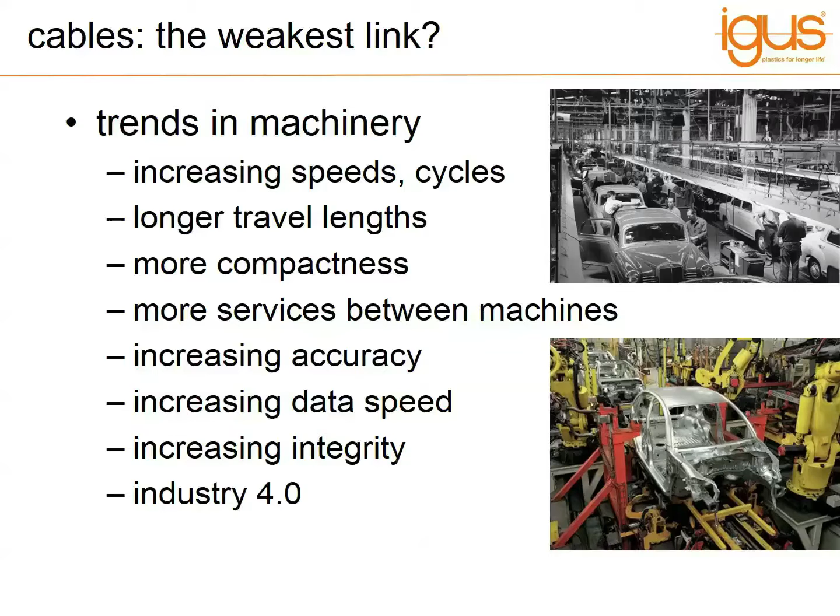Now these trends together are leading to a lot of demands on cables which are moving. So anywhere where you have a moving part of a machine and a fixed part of a machine, the cables in between, we are seeing more and more issues arising with these types of moving cables because of all of those trends. The typical things that we see are slow data rates, which is, for example, coming out of attenuation or interference. We're seeing weaker signals sometimes, and most commonly intermittent signals and dropouts, which are the hardest ones to track down. And often our customers tell us they check all sorts of other parts of the machine, but in fact cables are often one of the first places you should look when you get this kind of behavior.

So what are the solutions? Well, one of the possible solutions that people were talking about in the past years has been wireless, and that it might be a cure for all of these ills. And on the face of it, that's a really good idea. We get rid of the moving cable completely.

However, as our customers are using more and more wireless solutions within factories, we're seeing that there are accompanying issues of interference in a very crowded bandwidth, and also, for example, metal structures within buildings sometimes blocking signals or interfering with them. And then the other side of the same coin is, how do we feed power or indeed fluids, hydraulic or air, to something wirelessly? There are people working on the idea of inductive power, but that's still far from a reality. And as soon as your machine needs air or hydraulics, then of course that cannot be done wirelessly.

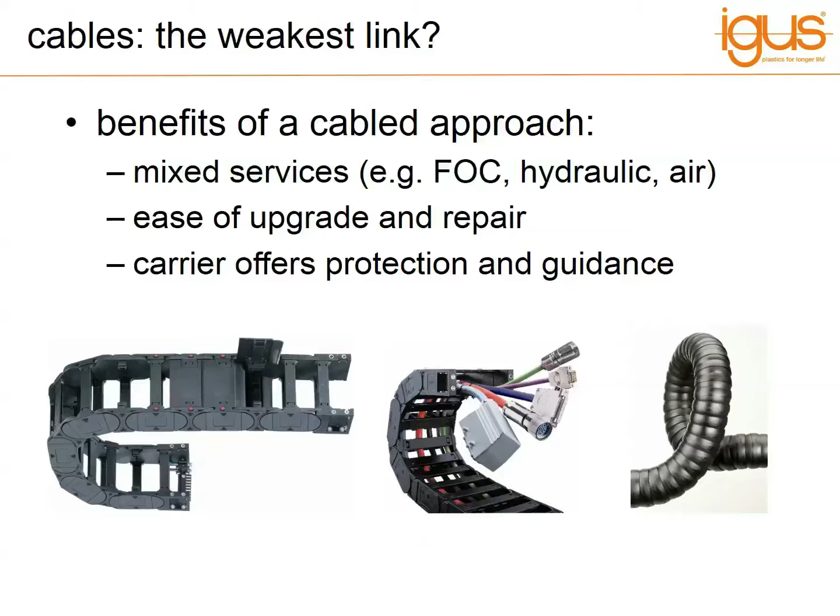The next effect, which is quite commonly seen, is what we call corkscrewing, where the cable as a whole takes up this corkscrew type shape. And if you've ever handled this, you'll also know that the cable feels quite stiff, and that's to do with how the copper has work hardened inside.

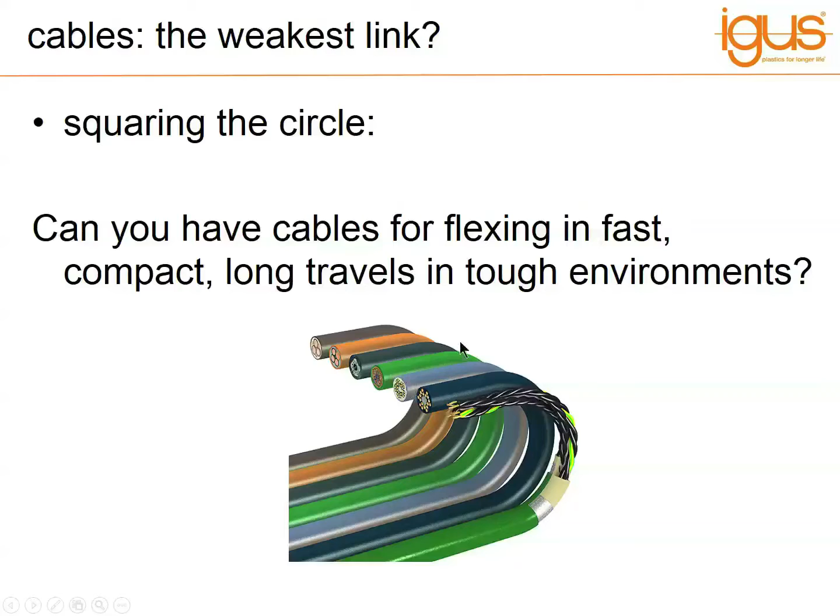So what we want to talk about today is, can we square the circle? Can we get all the benefits of cables and a cabled approach from moving machinery, which will also work in this increasingly fast, compact, sometimes long travel, and in many cases tough environments that are presented by modern day machines? Well, of course, we believe the answer is yes.

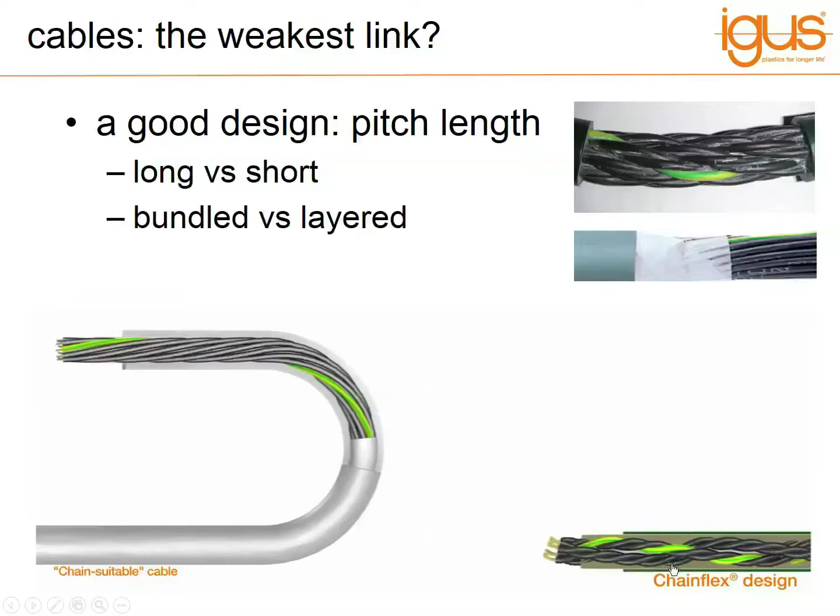Also, in many cases, cables will simply be layered, again like this design here, where they're just laid up in layers. And what we've discovered is that there's a much better approach, particularly with high levels of multi-cores, that once we get to a 12 is to bundle. So very, very tight pitch. You can see the same position very, very quickly, but then bundling, taking these bundles and braiding them in the opposite direction.

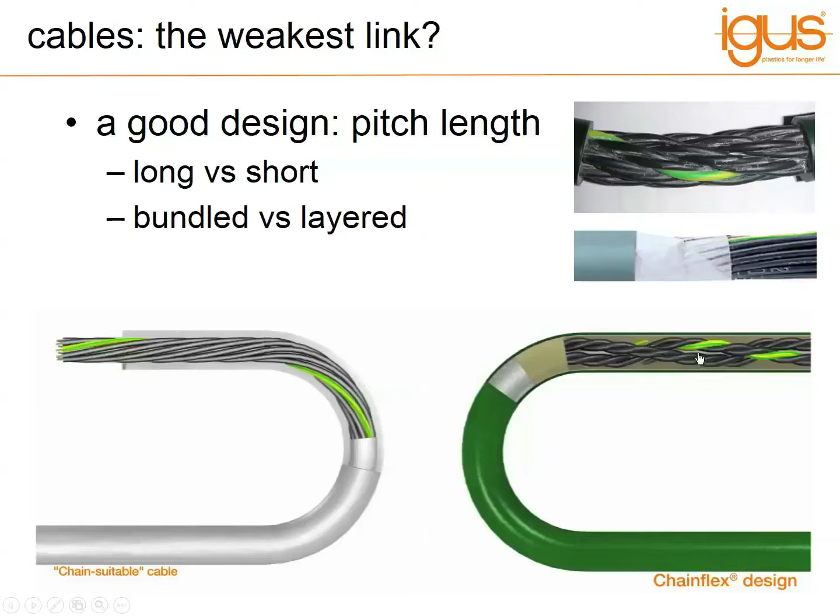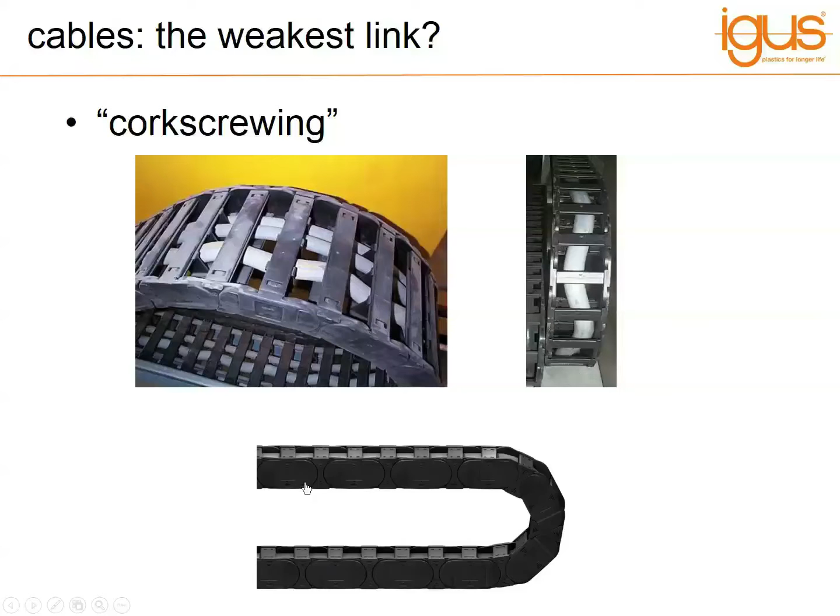And what this means is that all the cores see a similar level of strain. Why is that important? Well, this is the real factor that drives the corkscrewing effect. And here you can see some corkscrewed cables inside cable carriers and energy chains, and this will show why that is.

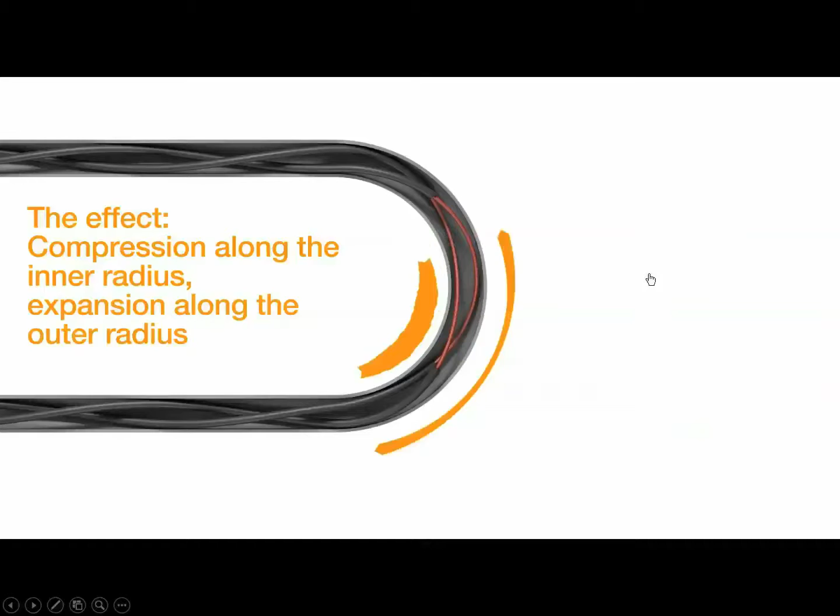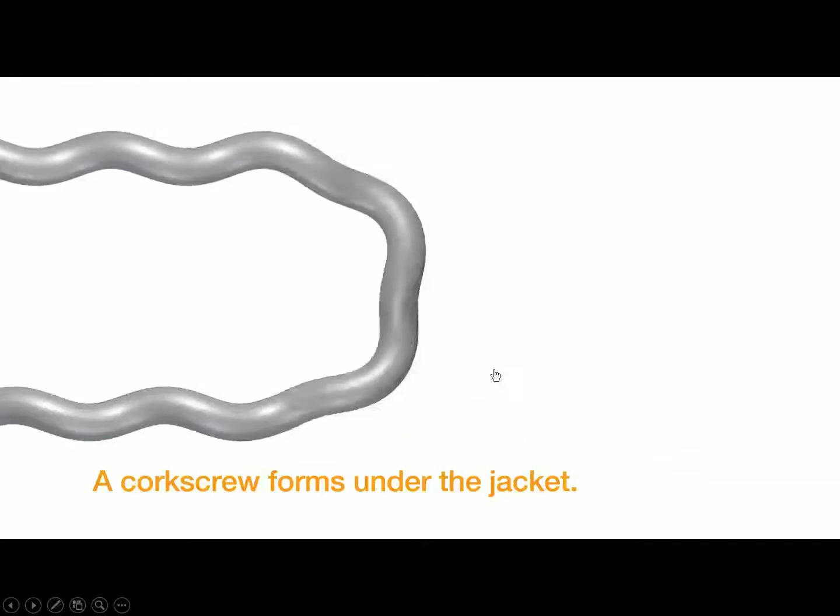So as the cable is moving inside the energy chain backwards and forwards, what's actually going on, as I just said, if we strip that down to just looking at a couple of individual strands, individual cores within this multi-core, you can see that one of these is being stretched and one of them is being compressed. And because they're away from the neutral axis, that's quite a big relative movement, and what will start to happen is that there'll be work hardening of the copper, and you start to get this lumpy effect, which is what we call corkscrewing. The cable takes on a corkscrew type shape.

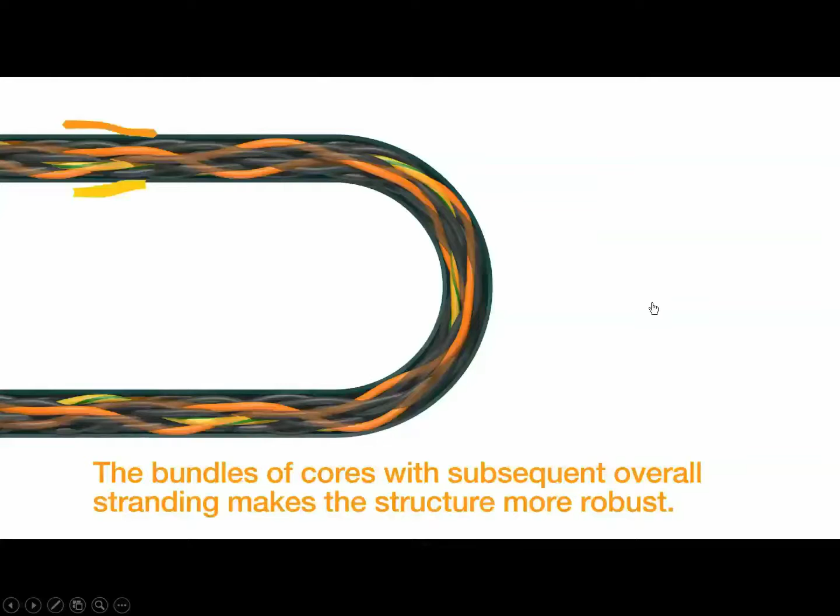If you bundle the cables and braid them with a very tight pitch, then, as I said before, all of the cores see a very similar strain, and you can see by the position of the earth core that it moves to the inside, to the outside, and back again very quickly, and all cores do the same, giving a very similar strain. And this is something that ensures that you have a cable which does not take on the corkscrewing shape.

The next thing we want to look at is the design of the shielding, and on the left hand side we have a fairly typical standard cable shield which is wound from one direction fairly loose, but what we've discovered is that really doesn't work very well at all in a constantly flexed application. The reason being, as you bend it, the outside here will stretch, and often these individual strands are being pulled quite a lot, and they'll break and they'll start to cause shorting or just opening up.

On the right hand side we see a very tightly braided approach with a very shallow angle. If you look at the angle compared with the left picture, you can see this is very shallow, and that means that two things happen. As you flex this cable, the stretching effect on the strands is much less, and also the opening effect and the allowing of electromagnetic interference is much less as well.

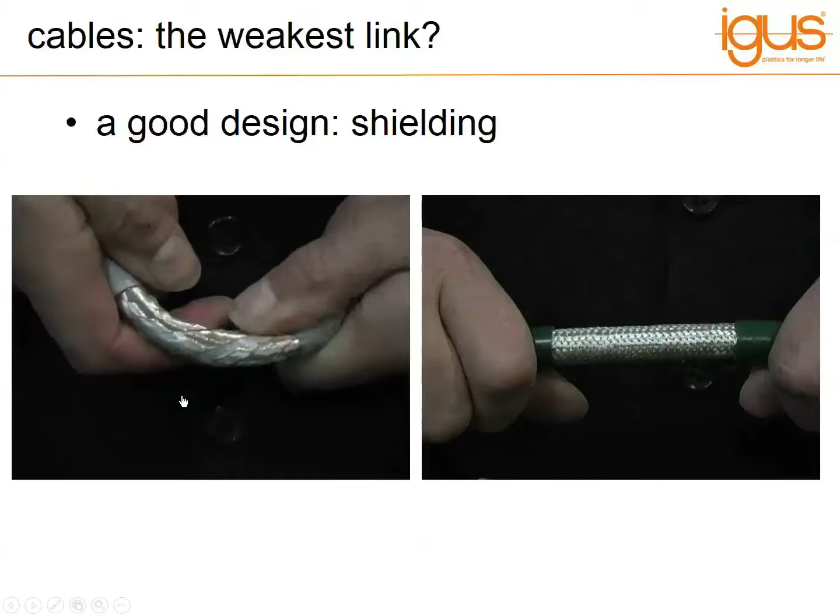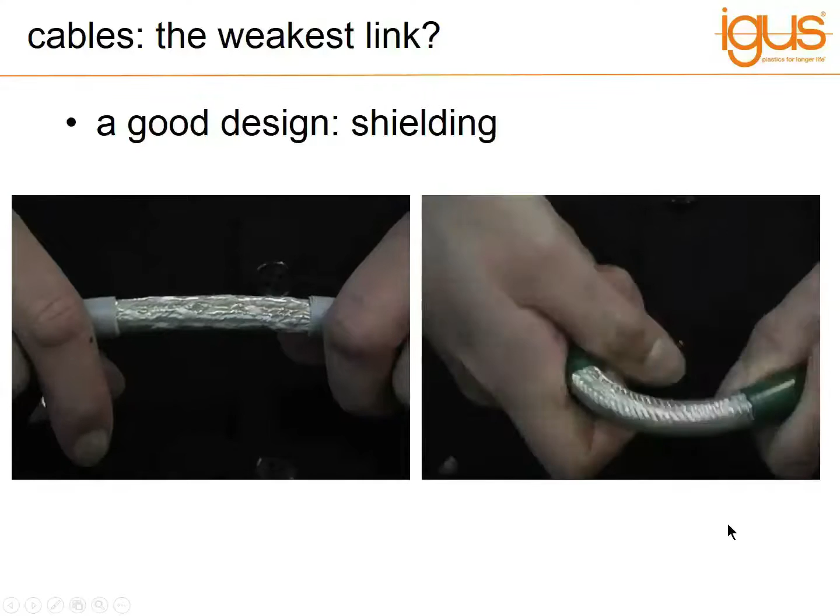So if we look at the next slide, you can see that as we take this cable and bend it, which is a standard so-called flexible cable, you can just move the strand wires around very easily, which means they can open up and really don't offer the same level of protection. If we look at the right side, as we bend that quite slightly, you can see that there's really no opening up, and that shield remains intact, which is good from a perspective of electromagnetic interference.

Next, we look at the jacket design. Now, on the right-hand side, if we believe that this braided bundled design is a good approach, what we now need to do is lock that in place and ensure that it stays put. Now, most standard cheap flexible cables will have what's called a hose extruded or sleeve extruded outer jacket, which means it's very loose. That's put over the top, and it means the cores can move around underneath.

The right hand side is something we discovered, that if you have a fully gusset filling pressure extruded jacket that fills in all the gaps and gussets around here, that locks the shape that you've built up with the cores in place and keeps it the way that it should be.

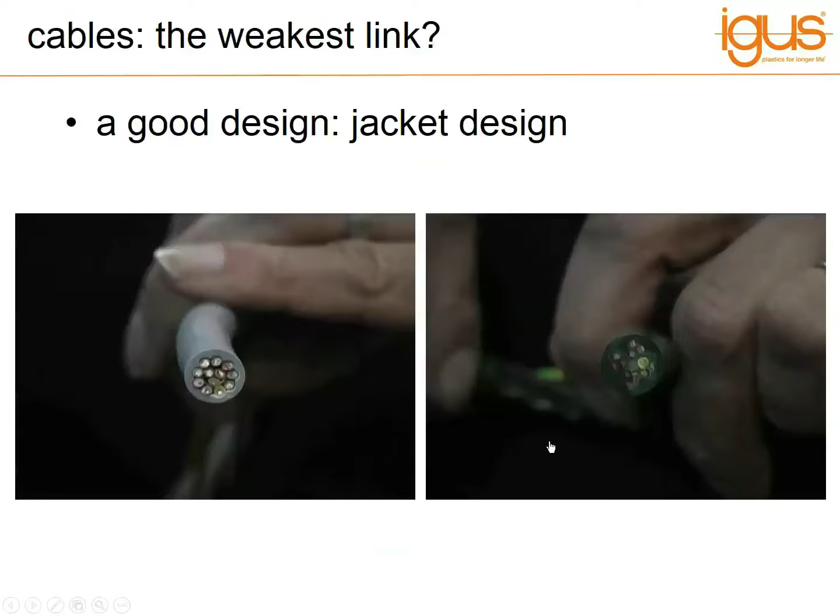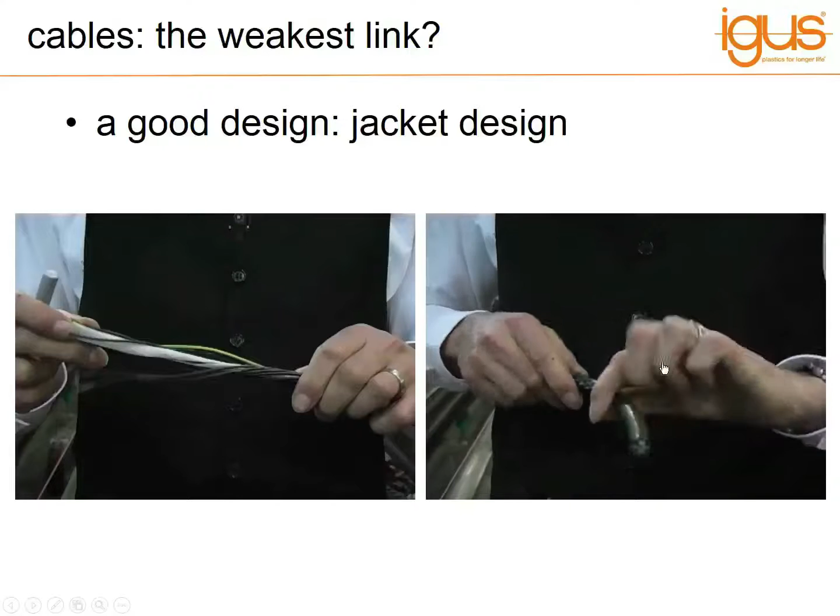And again, if we look at this video here, there's a standard cable. The typical way that you can see that is you can just pull the outer sleeve and it comes right off. And on the right hand side, the pressure extruded jacket, the way that you can tell that it's really guarding the layup of the cable really well is that you won't be able to pull that off very easily. It means that cables are a tiny bit harder to strip, but actually that's a small price to pay for something which is going to last very well in the long run.

Finally, when we're talking about outer jackets of cables, we want to look at jacket materials. Now, the two families of materials that most cable makers use are PVCs and PURs. And in some cases, you'll also see TPEs. We use this. This is a very high-grade material, the thermoplastic elastomer family, which is very good for absolutely the hardest

of environments. So PVCs are nice and cost-effective, but they are weak when it comes to abrasion, or if they're under UV light or temperature changes or oil, they can become brittle and fracture. PURs are much better for the above things, coolants and oil and temperature changes, and TPEs in fact are much better still. They're even harder and even better under different temperature ranges.

But one of the crucial things to understand is that the term PVC, PUR and TPE is a very generic term. So not all PVCs are the same. And you can see this here, for example, from these photos. There are 3 compounds that we've been involved with developing, and all of these are PVCs. They've all been subjected to the same abrasion test, but look at the difference here.

So the bottom one, for example, the outer jacket has gone right through to the cores. The middle one has had some abrasion, it's almost flat, but nowhere near as much. And the top one has some marking, but really hasn't taken much off the outer jacket. Now, all 3 of those are still PVC and could be labelled as such.

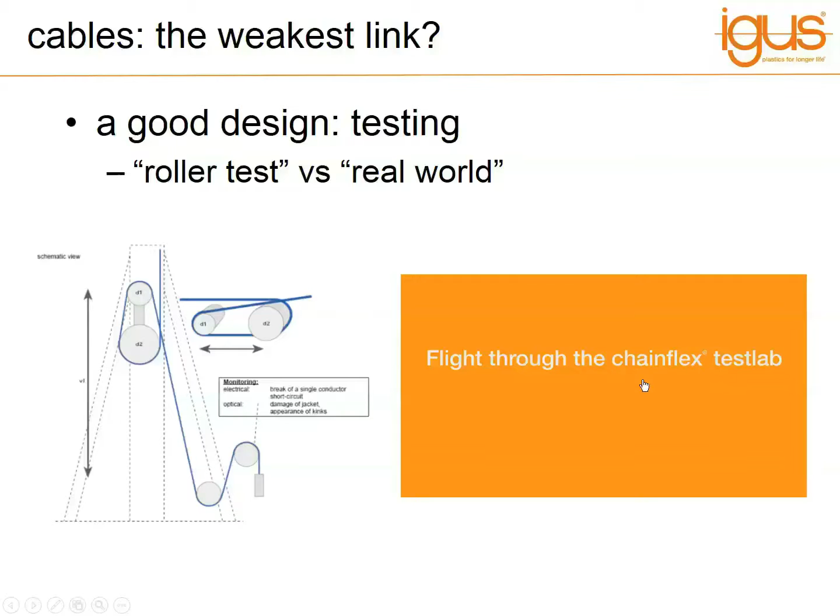Now, this is a very simple test, and we don't think it gives a very accurate picture of how cables really behave in moving applications. And in a moment, I'm going to run a video that shows how we go about doing this. And this is something that's worth considering: when you're specifying a cable, has it been tested in the type of applications that you're going to use it for?

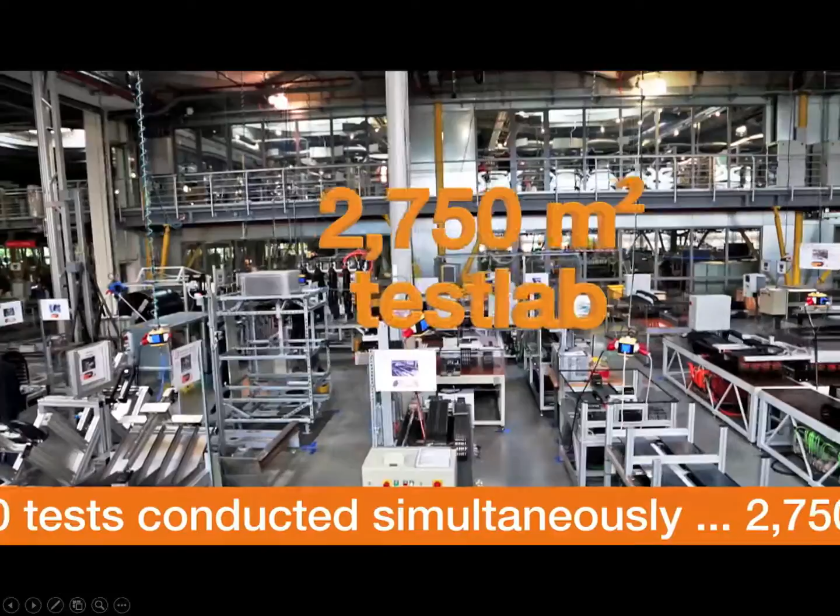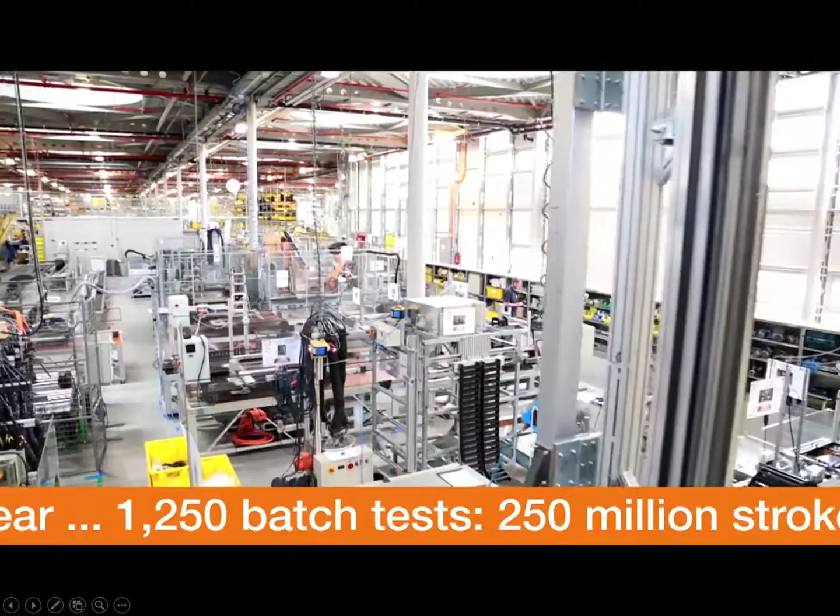So if we look at this video, this is an example of our test lab, and it's just an example of how we believe cable testing should be done. And it's the sort of testing that should give you complete confidence in what's happening. So here, for example, you can see robots moving around constantly, different types of energy chain moving around the cable carriers. So here's a bank of ones which are being moved through twist.

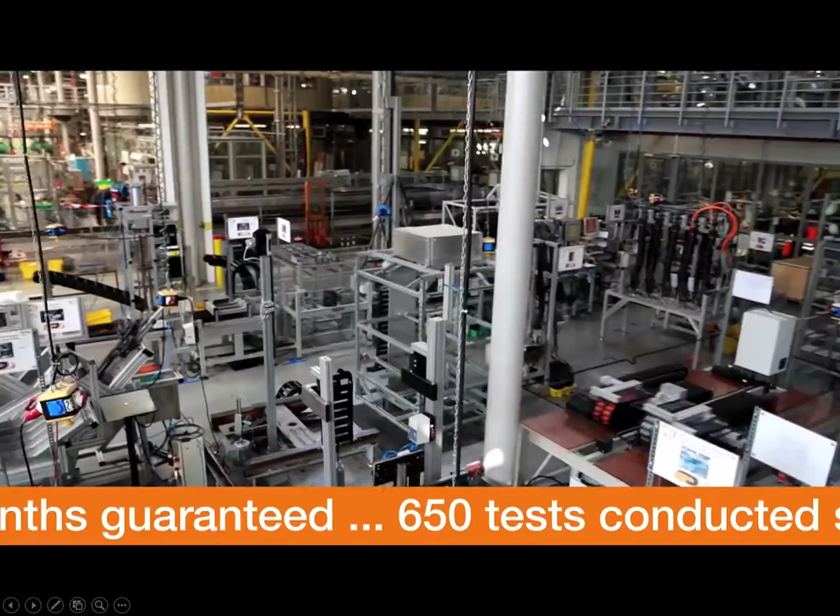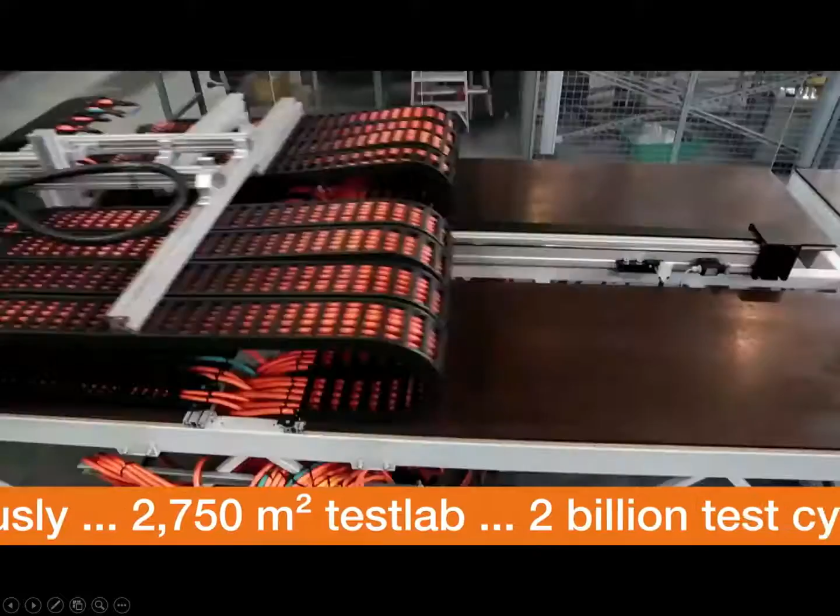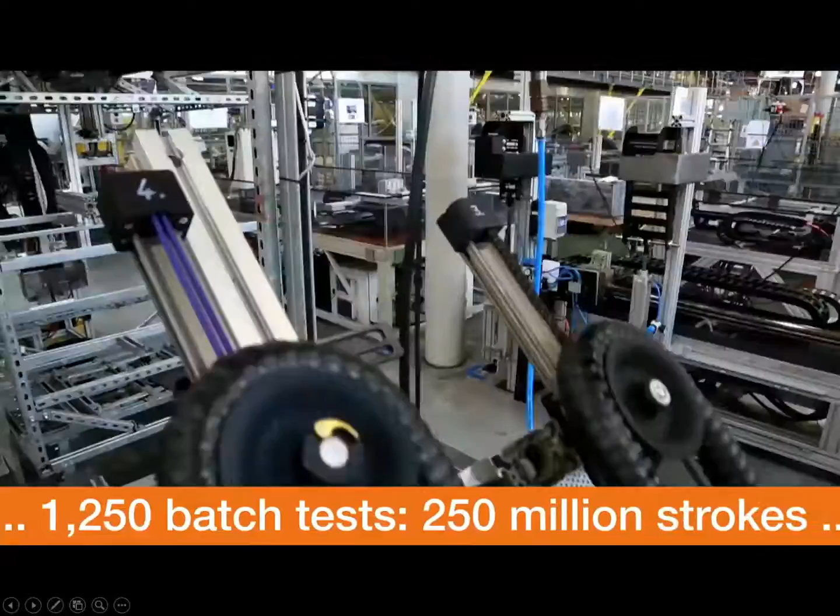But all of the chains that are moving backwards and forwards contain cables that are being monitored continuously. The applications might be vertical or horizontal. They can be high speed or low speed, very small bend radius, very large bend radius. Long travel here, for example, there's one at 50 meters and another one at 120 meters, because that will behave differently. Robots, different styles of robots, and twisting types of applications.

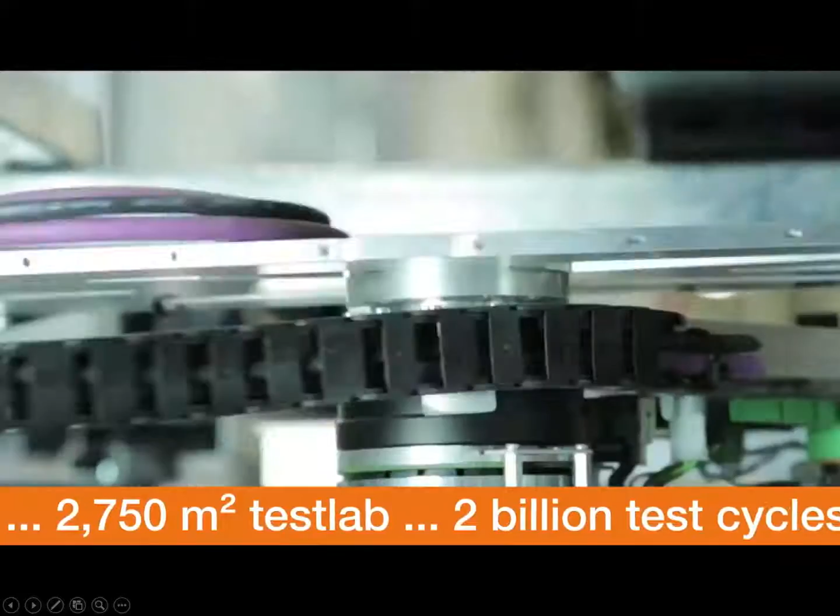And in all cases, our cables are terminated into an automated test machine, which is picking up literally billions of electrical test results as we go. Also, we might be exposing at the same time the chains and the cables to different materials like coolant fluids or oils. Here's the automated electrical thing I was talking about. And in this way, we are truly representing everything that's going on.

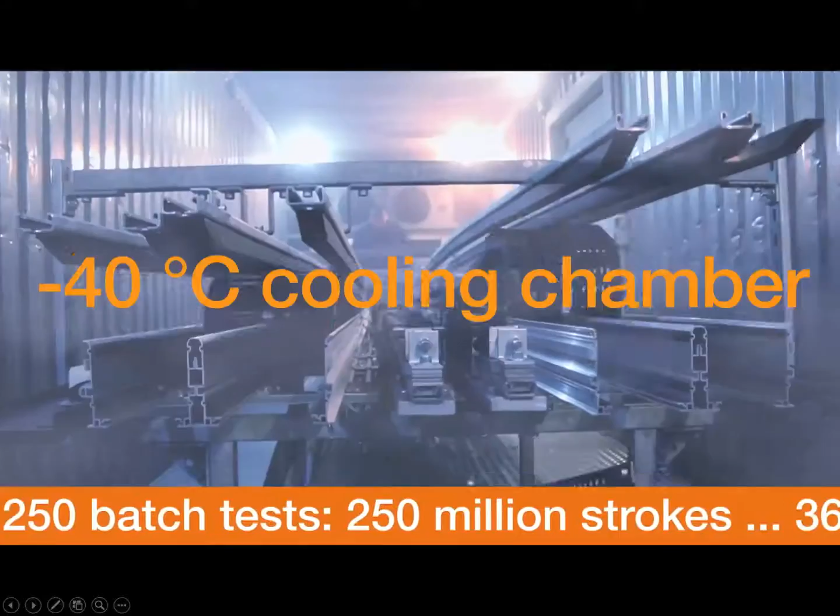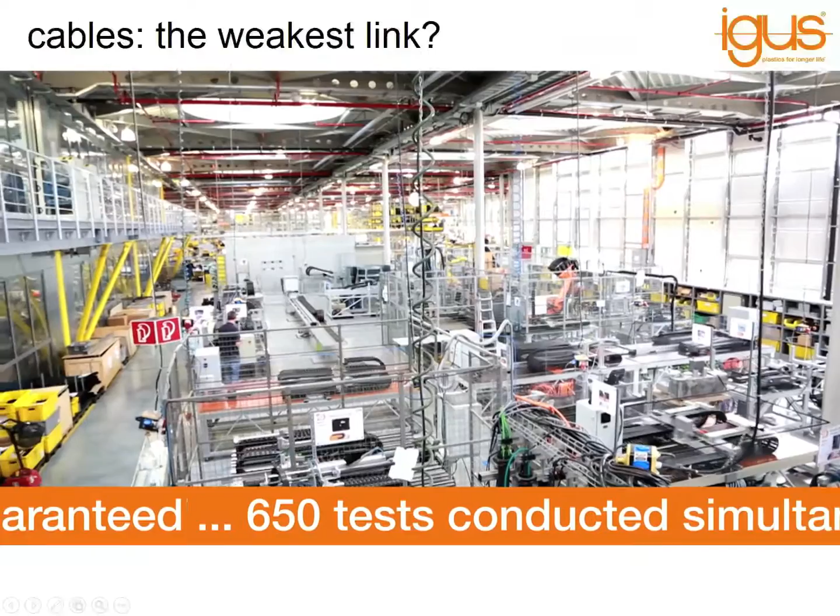Here we have a climatic chamber that can go down to -40 degrees, which would typically make a lot of cable jackets brittle. Again, something that you could try and work out in theory, but will only ever really understand if you test in an application like that.

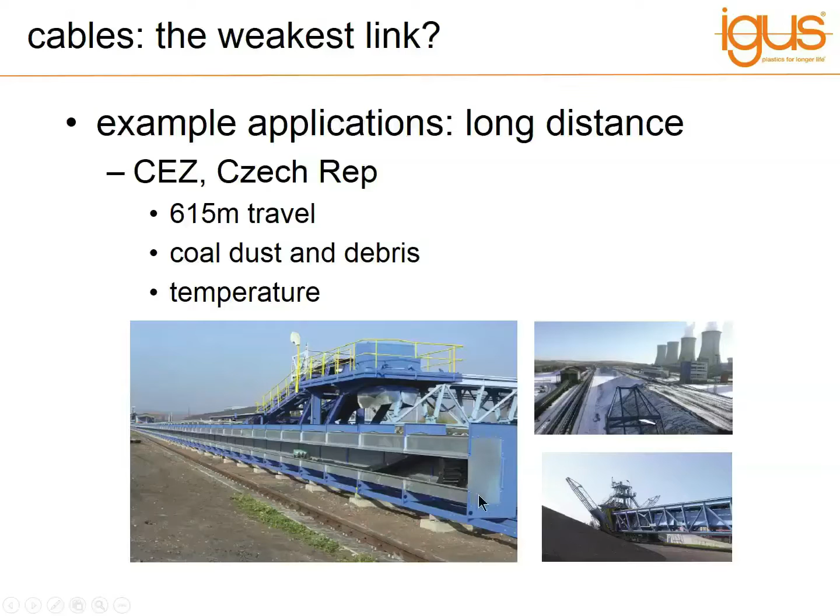Another application which I'd like to draw your attention to gives us another important feature of the cable design. So here, for example, moving cables might be used on a crane, but that crane might be somewhere like Dubai and it might be in Russia. It gives a huge temperature difference. Let's say, for example, it's using a flexible fiber optic cable. Now that might become quite brittle at low temperatures. Particularly low temperatures might be vulnerable for it.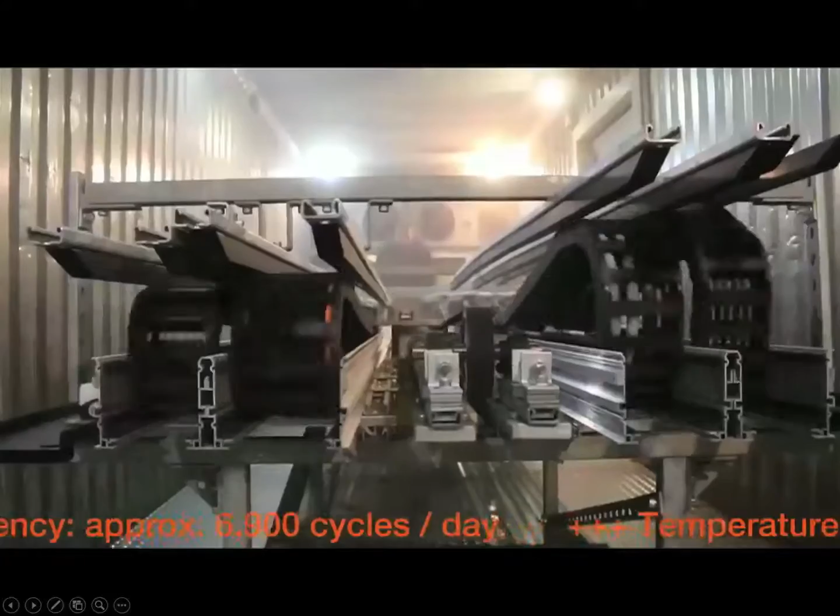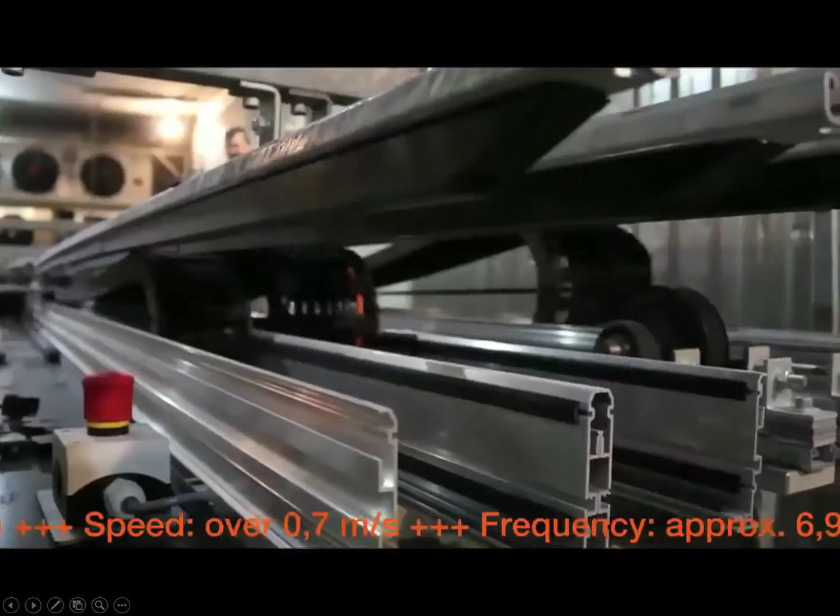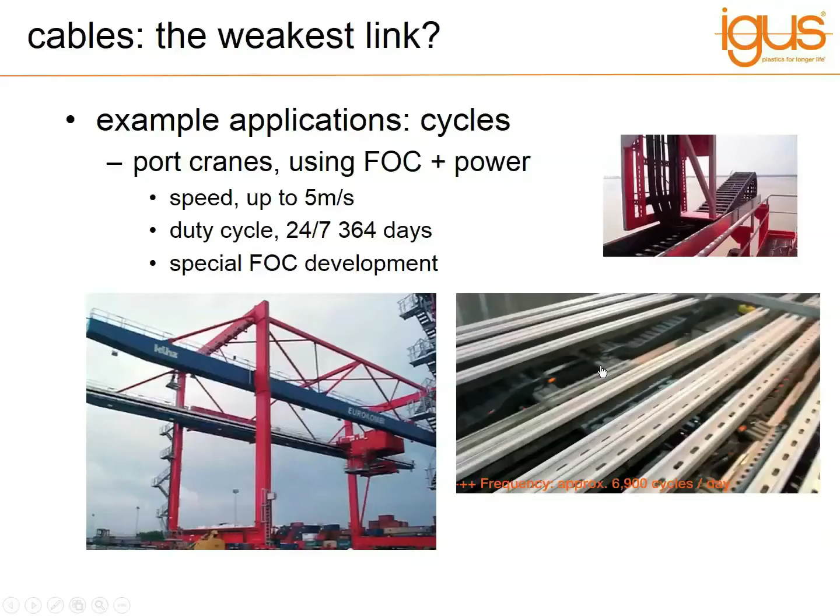And again, this is all part of the goal of being able to say that the cable is absolutely guaranteed for 10 million movements or 3 years, or whatever your cable manufacturer can offer. And if this kind of level of testing is done, which it should be, then you can have complete confidence in that figure. Then we can look at things like torsion.

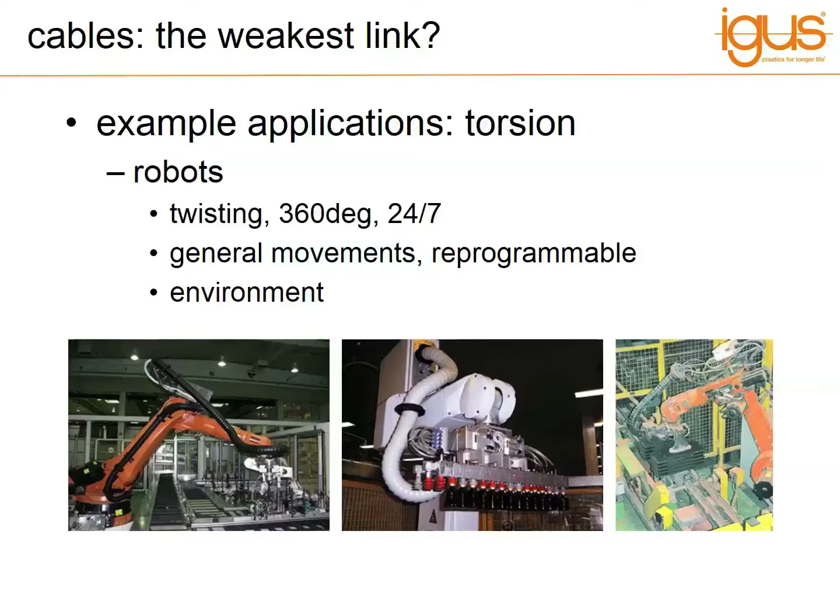Torsion is another very damaging component of flexible cable use, but with the correct design of cable can operate very successfully. And so here, an example of robots in pharmaceutical, even things like handling bricks or tiles, have very sharp, fine dust and debris around. And we again have many applications where with the correct design we've applied cables which can undertake millions of twisting movements. And again, that's something you need to consider, particularly if you're using robots.

So that's concluding this talk. I've just tried to go over some general areas there and answer this question. So our original question is, are cables a weak link for moving machinery? Now, I believe, and hopefully we've shown you more about today why we believe that with the correct design of a flexible cable, they do offer a robust and reliable means of power and data transfer, and that they can be used with complete confidence in moving machinery.